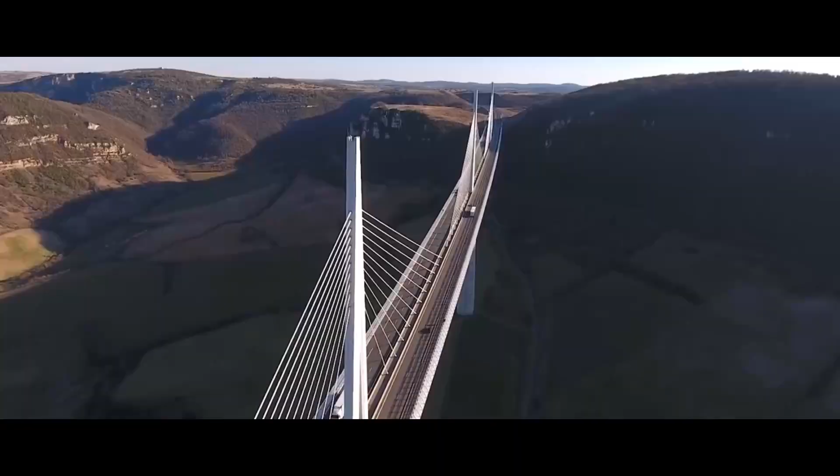When the word civil engineering is mentioned, visions of bridges, highways, and many structures come to mind. Occasionally, it is seen as a difficult program, or that students enrolling in this course must be academically knowledgeable. However, it is important for this generation to understand what civil engineering performs and how its specializations work. The biggest effect on our quality of life will come from civil innovations.

If you think civil engineers are insignificant, let me ask you these questions. Who built the malls where you go after class? The waters that flow into your home, and who finds out how to transport water from one place to another? To be sure, some of our existing infrastructures, such as bridges, roads, sewers, walkways, and airports, are decades old. It is the responsibility of civil engineers for designing, creating, and building new, better infrastructure.

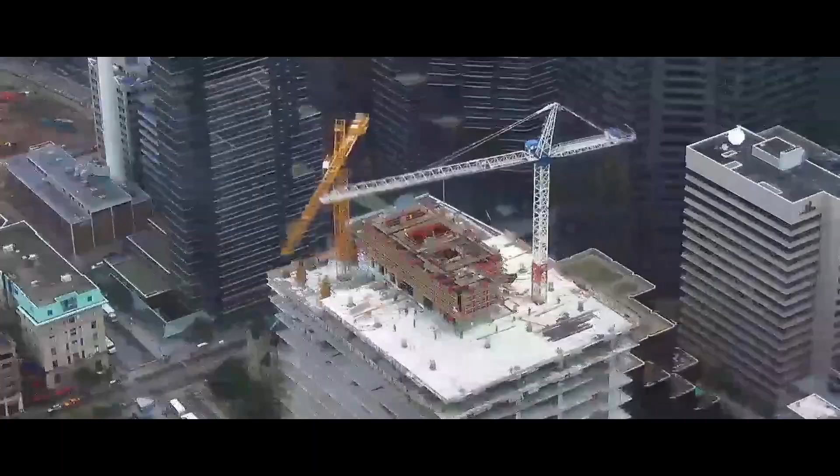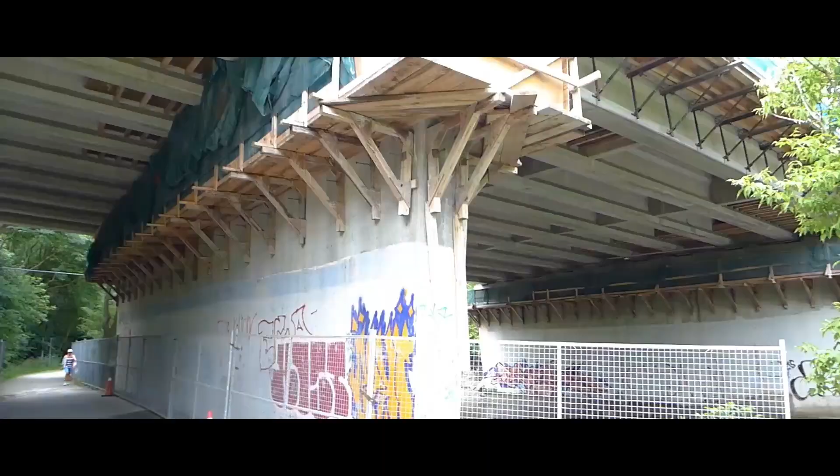Because urbanization reduces the amount of land available for construction, we must build higher. Clearly, it is one of the best professions in the world. They help to improve the people's quality of life. One of the specializations of civil engineering is construction engineering and management. It makes the paperwork concept a reality. Time, budget, and quality are real variables of construction engineering.

They are in charge of ensuring that the design and specifications are followed on the site. Construction engineering and management use their expertise in business, technical, and management. They made a significant contribution to each project. The structural engineers are known as the guardians of structures, while CEM engineers are known as builders of structures.

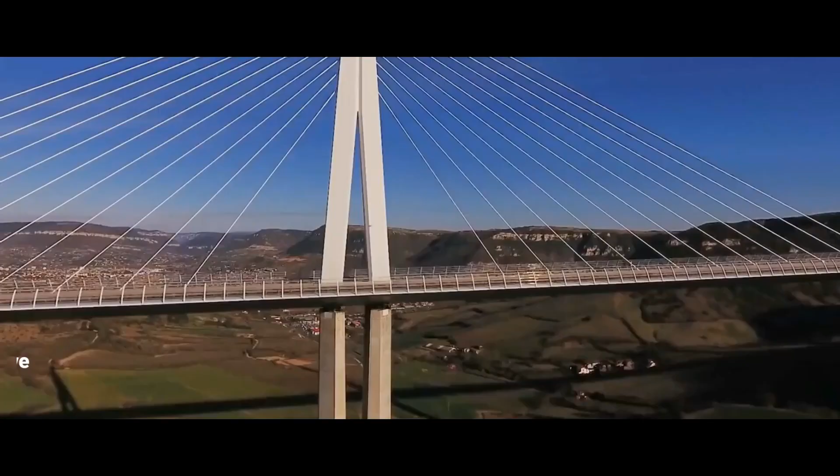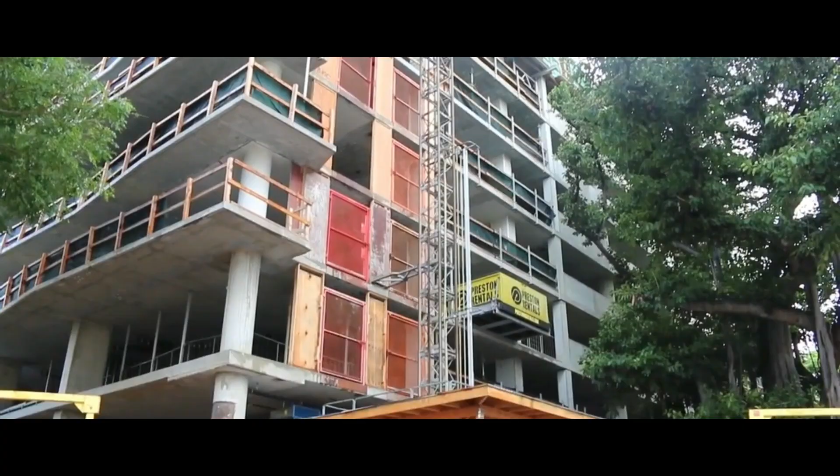Construction engineering and management is a profession for individuals who have great ideas and want to see their visions realized in the real world. If you have ever wondered how the country's tallest buildings, airports, stadiums, roads, bridges, and dams are built, the simple answer is that it's all due to people who work in the construction engineering and management industry. It is one of the civil engineering specializations. This field combines the study of construction engineering with the study of project management. This discipline is concerned with the whole course of a project's development.

Furthermore, it is a profession that is primarily concerned with the design, planning, building, and administration of a variety of infrastructures. Constructive application of critical thinking in scientific and technological areas increases the likelihood of a building project going well. This job may assist increase productivity and overcome barriers at the workplace by developing new solutions and quicker procedures. When it comes to enhancing safety, productivity, and catastrophic event resistance, construction engineering management may be helpful. The field of construction engineering management encompasses everything associated with the construction industry.

Planning and supervising the construction operations of a project, which entails conducting site layout, scheduling of the overall project duration so as to finish the job on time, and choosing the appropriate equipment for the job in order to do it as quickly and safely as possible, as well as organizing the work team by assigning individuals to particular areas of competence that may help with the job.

It is also essential to manage the materials in terms of quality and quantity, to keep track of the materials used in the project for simple compilation and reporting, protecting the environment by ensuring that everyone is on the same page, using safety equipment in construction, and ensuring that falling debris does not fall on persons passing by.

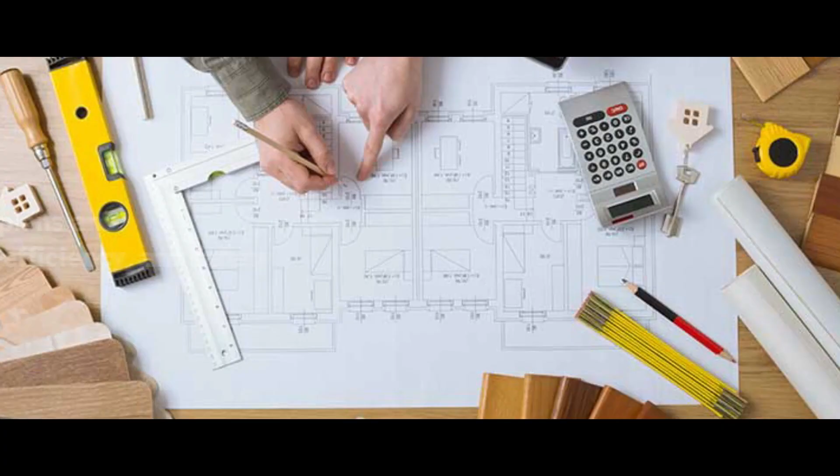CEM engineers should constantly review the plan to see if it is on track with what is actually happening in the project. Minor modifications may occur, so they must also adapt to ensure its safety and constructability. Maintain contact with the owner for whom you are constructing. They are your customer, and you should always explain the present state of the project with them in layman's terms. You should also constantly ask them what they want.

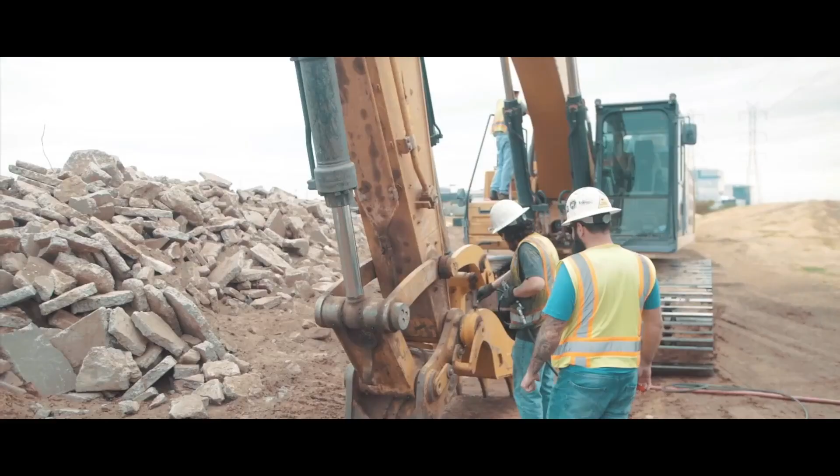Construction engineers might choose between working in an office environment and working in the field. It's not uncommon for it to be a combination of the two. Some construction engineers are more concerned with the design part of a project, whereas others are more concerned with the actual construction phase of a project.

With a degree in construction engineering, you can pursue various professional routes: general contractors, owners and developers, mechanical or electrical contractors, renewable energies, consulting and design firms, the oil and gas industry, the aviation industry, law firms, and historical restoration are some of the businesses that fall into this degree.

After a few years, you can sit for the professional engineer exam and become a licensed professional engineer. With a construction engineering degree and the professional engineering license, you can expect to rise through the ranks of your company's management. Many construction engineers rise through the ranks to hold managerial roles and even become business owners of their own construction companies.

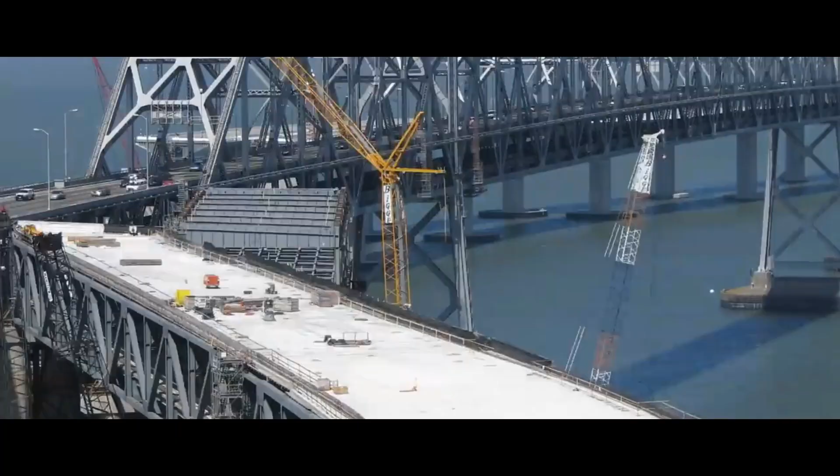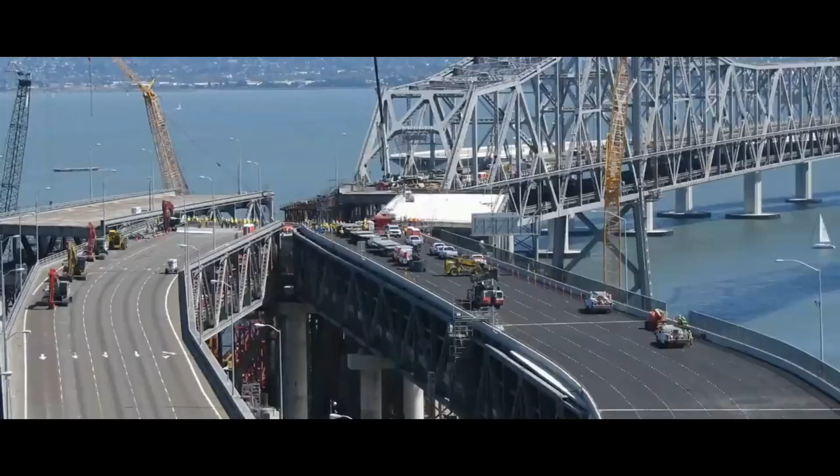Construction managers are accountable for monitoring and directing a variety of construction projects successfully from start to finish. Because construction managers are also project managers, construction engineers must be organized, strategic thinkers capable of collaborating with designers, architects, builders, and other engineers to translate theory into practice.

Construction managers are in charge of the planning, budgeting, monitoring, and implementing of construction projects from their inception to their completion. Estimators in the construction industry are responsible for creating and revising cost estimates by the Construction Specifications Institute MasterFormat framework from pre-project planning to the completion of a construction project.

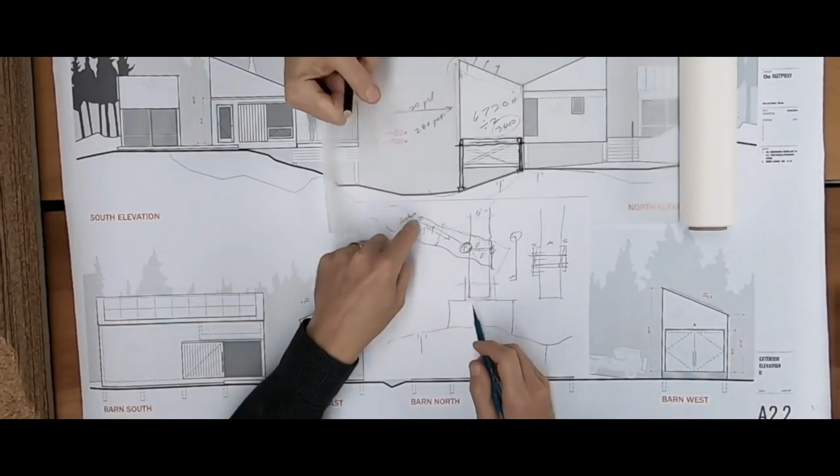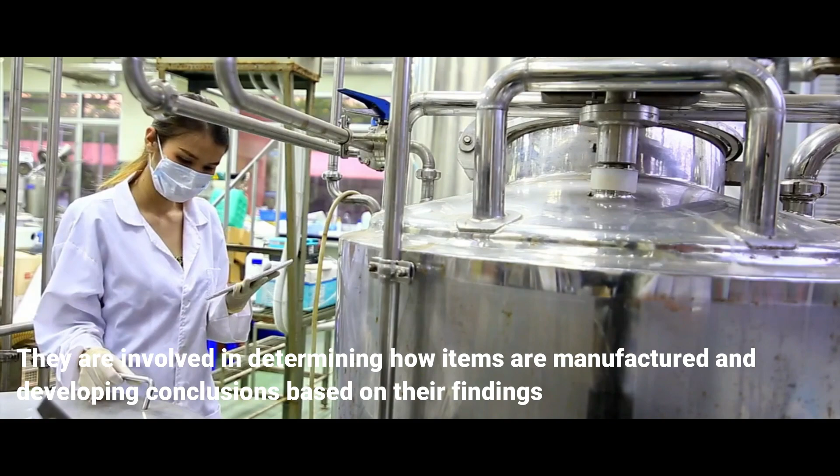When it comes to construction projects, a construction director is usually responsible for managing, supervising, and directing all aspects of the project. Construction project engineers collaborate with other engineers and contractors to guarantee that a construction project is completed on time and within budget. Engineering analysts can find employment in various industries ranging from information technology to healthcare administration. They are involved in determining how items are manufactured and developing conclusions based on their findings.

Engineers in charge of construction projects ensure that they are completed on time and within budget. Additionally, they may be held accountable for the safety of temporary structures utilized throughout the construction process. A construction manager is typically someone who has a college degree and has previous construction experience under their belt. Construction is becoming a more sophisticated and mechanized process, and the number of people who need formal education will probably expand in the future.

Educational level: in the Philippine setting, studying construction engineering and management is under the new curriculum of the 4-year civil engineering bachelor's degree. If a student wasn't able to enroll in the new curriculum, he or she will still be able to continue pursuing construction engineering and management by studying for a master's degree specializing in construction engineering and management, which is already under the Master of Science in Civil Engineering or MSCE, Master of Engineering Program or MEP, and Professional Science Master's Degree in Construction Management or PSM.

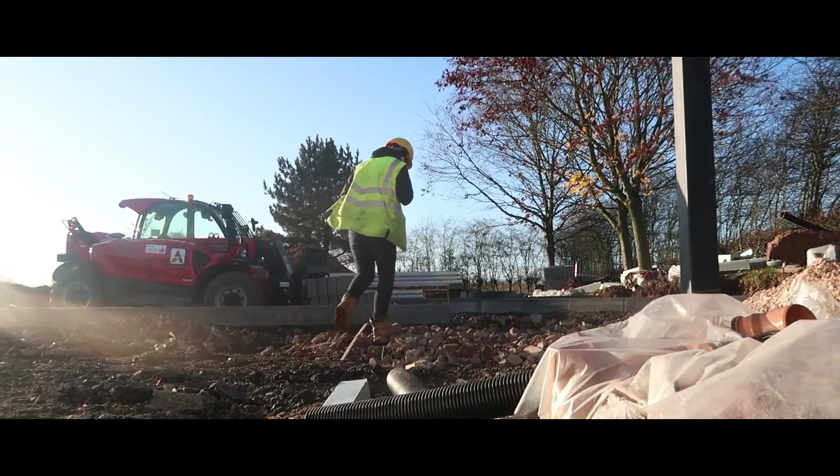The fields of interest that students must watch in the construction engineering and management track are advanced construction methods, construction cost engineering, database management, project management, quantity surveying, and safety management. Students in the construction engineering and management program have the opportunity to develop additional expertise in mechanical engineering, environmental engineering management, building information modeling, and many other options through minors in these fields.

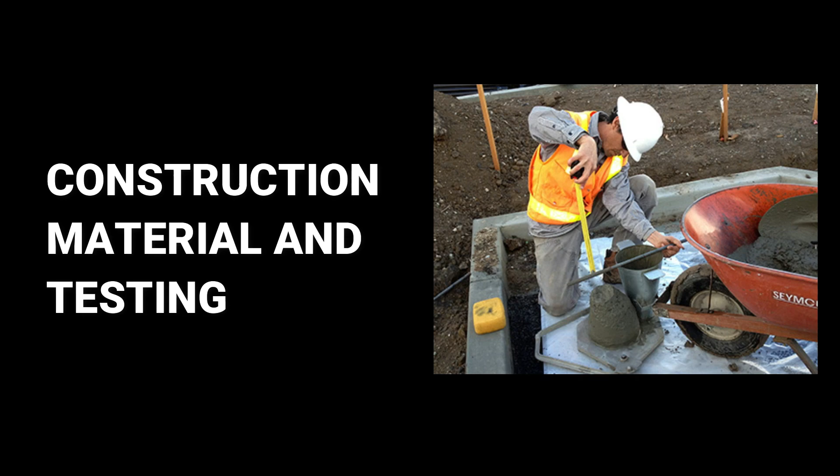The Construction Engineering and Management track specialization will equip students with a solid foundation in civil engineering, emphasizing current construction materials, techniques, and successful construction management practices. This specialization focuses on analyzing, designing, developing, implementing, and administering the complete infrastructure and large-scale construction process. The core subjects of construction engineering and management are as follows: General Science and Mathematics, Engineering Mechanics, Construction Management, construction materials and testing, building systems design, and lastly, quantity surveying.

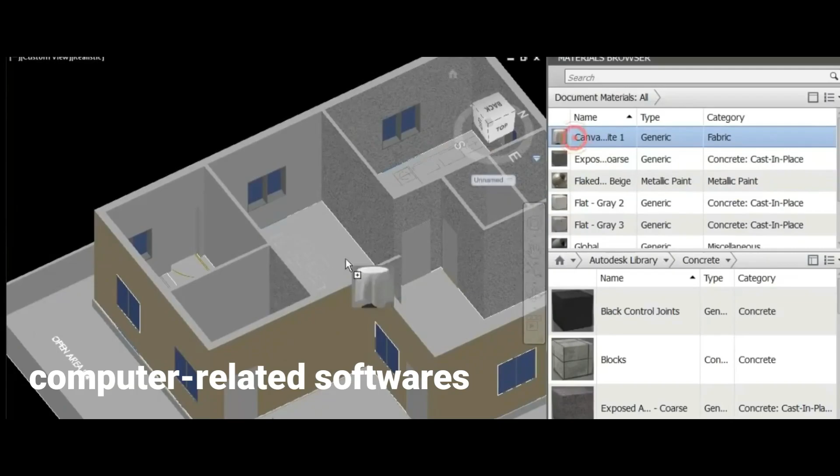Construction engineering and management requires the use of strong math, science, and computer skills, critical and analytical thinking, time and people management, and good communication skills. People who love building structures, have an aptitude for applying science and engineering methods to solve problems, and have the desire to learn in a constantly changing environment are also at an advantage in this field. CEM also requires the use of computer-related software such as computer-aided design and building information modeling.

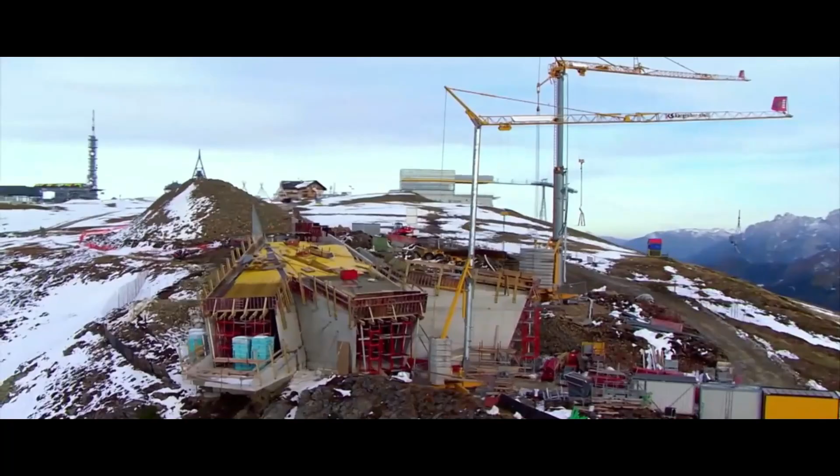The graduates of CEM are expected to practice any discipline that involves construction engineering and apply their knowledge of the fundamentals of structural and construction engineering like design and analysis, material testing and quality assurance, building systems, construction technologies, and lastly, surveying. Construction engineering and management is essential for the advancement of society. Construction engineers design and execute processes for buildings and maintain the infrastructure of our world.

It is at the forefront of establishing techniques and methodologies for creating 21st century building designs that integrate cost-effective innovations in energy efficiency and sustainability. This field can help improve safety, productivity, natural disaster resilience, and any aspect of the construction industry that could be addressed by construction engineering.

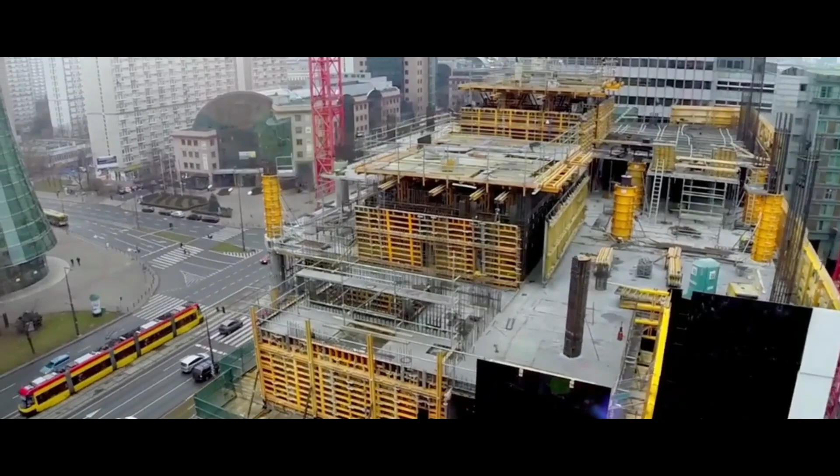In the Philippines, the average monthly salary of construction engineers is 35,000 pesos. Meanwhile, the average yearly salary is 420,000 pesos or 215 pesos per hour. For entry-level positions, the salary starts at an average of 270,000 pesos per year, while experienced workers make up to 720,000 per year. However, the salary still depends on the experience, the role in the company, and their knowledge. The average salary may also change as time goes by.

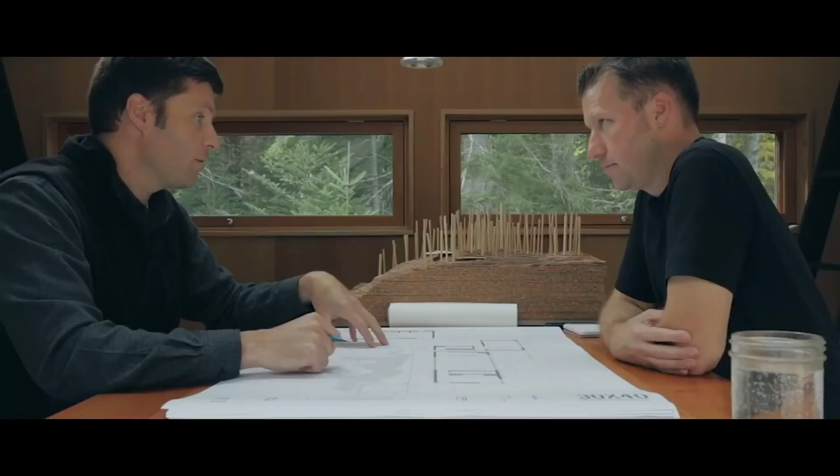First is to create a flow of communication. Establishing a flow of communication is most important of all elements of project management. May it be good or bad news, they are equally essential for the knowledge of everyone, including stakeholders and suppliers in the plant. A tool that provides ease in communication is Collaborative Work Management or CWM tool. In these, comments, attachments, scheduling changes, news, and budgets are synced real-time.

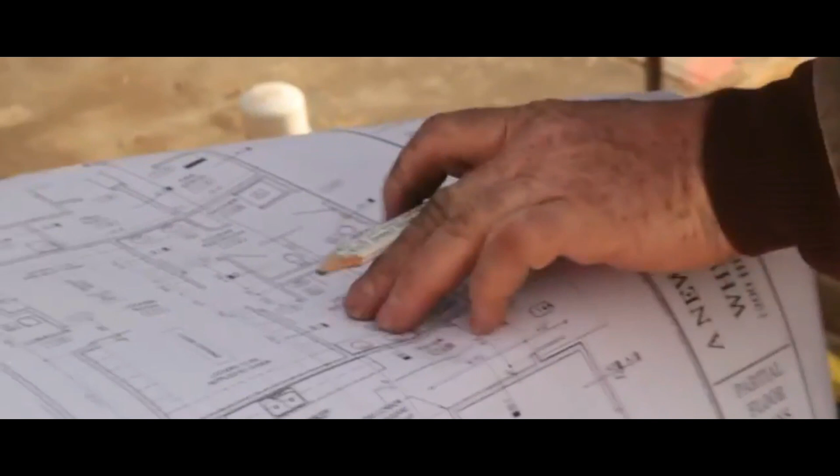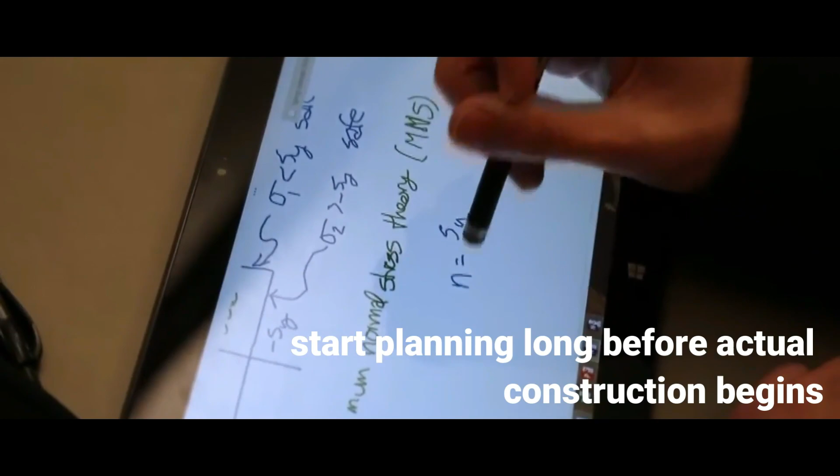Next is to make a habit of continuous planning. Planning may be the second of the Project Management Institute's 5 phases of project management, but construction project managers should start long before the actual construction begins and continue revising and developing plans until the project ends. This revision means being extensive to the extent that each stage of planning, from design to pre-construction and procurement stages, must undergo adjustments if need be.

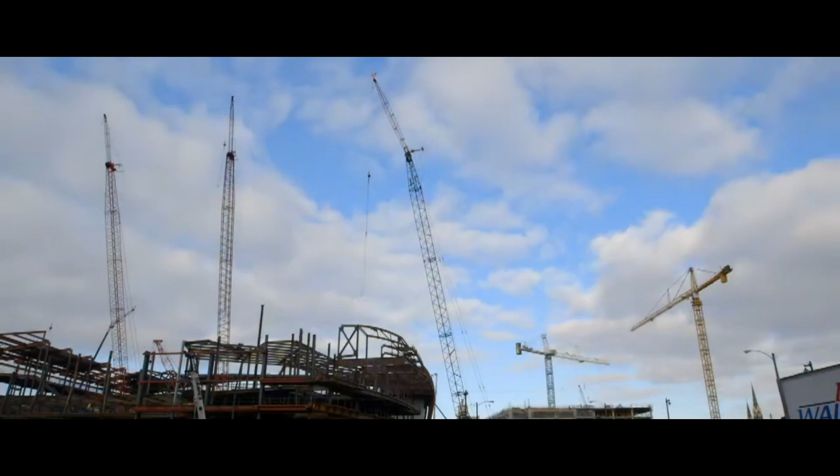Next is to observe and ask questions. Every good project manager becomes an integral part of the process, working figuratively and literally alongside others. Among other professions across industries, CEM engineers require attention and integrated effort just because of the nature of its work, which is so physical. At times, it is required to do field visits and inspections to actually see an issue in person before it can be resolved.

Fourth is to use tools to monitor costs and budgets. What needs to be monitored? Permits, wages, materials, and equipment of construction projects. What tools must be used? Software that tracks budgets. Since project managers have to think money constantly, from the initial bidding process to project closeout, all costs and finances must be tracked, monitored, and recorded using these tools.

Lastly is to implement automated reporting systems. Not everyone in a team that has concerns regarding the budgets or progress of a project has to be replied to by a project manager one by one. Automated delivery tools are oftentimes used by these kinds of work, where weekly distribution of various spreadsheets and status reports are needed. Some commonly used reporting systems are Safety and Health Management, Smartsheet, and DocuSign.

A construction project schedule is a written or a visual depiction of the steps necessary to finish or build the project. It is similar to a contractor's bid, that is an estimate of the amount of money it intends to spend on the project. The schedule is an estimate of the amount of time needed to complete the project. We need schedules to assist us to manage our construction projects as they grow more complicated and have tighter budgets.

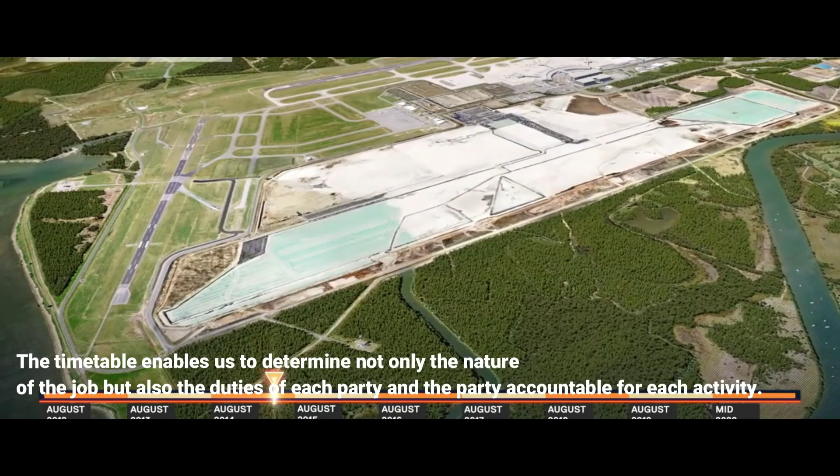Manpower should be scheduled in such a way that it avoids interruptions of productive time, repeated staffing up and down like hiring or firing of workers, creating a work logjam, or peak demand for equipment such as cranes and trucks. A scheduled equipment indicates the precise position of every piece of equipment, big or small, by using a numbered key or providing a description of the equipment in place.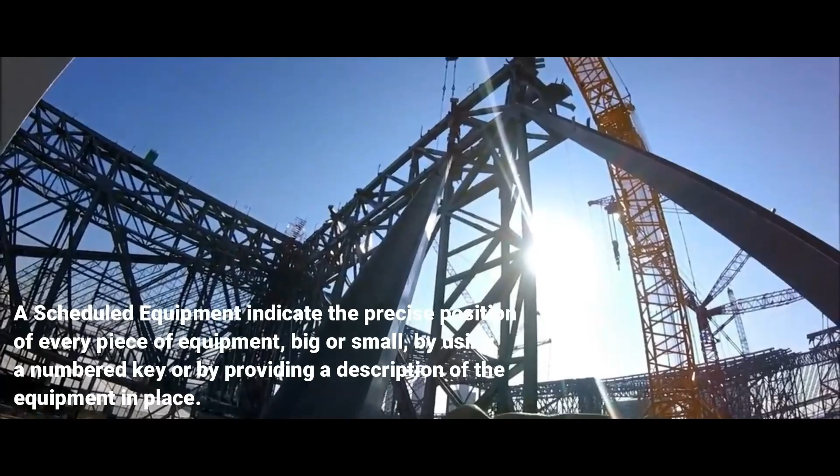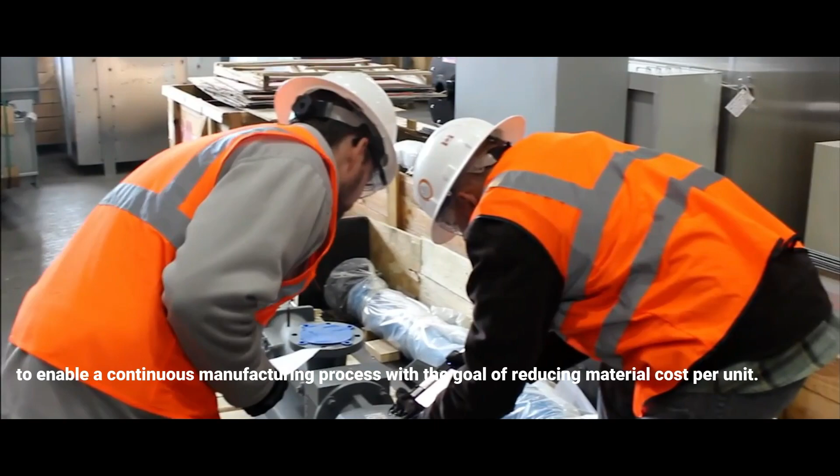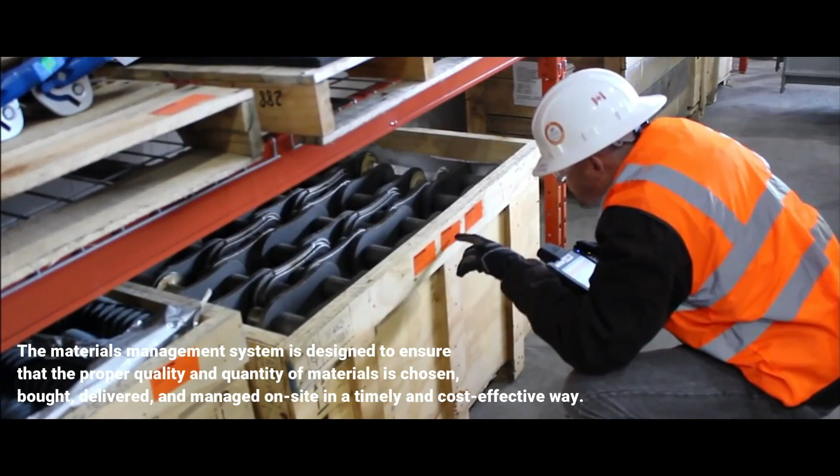Material control is a term that refers to management actions that include issuing instructions or directives to guarantee that sufficient quality and quantity of materials are maintained to enable a continuous manufacturing process with the goal of reducing material cost per unit. The goal is to ensure that the construction materials are readily accessible at the point of usage. The materials management system is designed to ensure that the proper quality and quantity of materials is chosen, bought, delivered, and managed on site in a timely and cost-effective way.

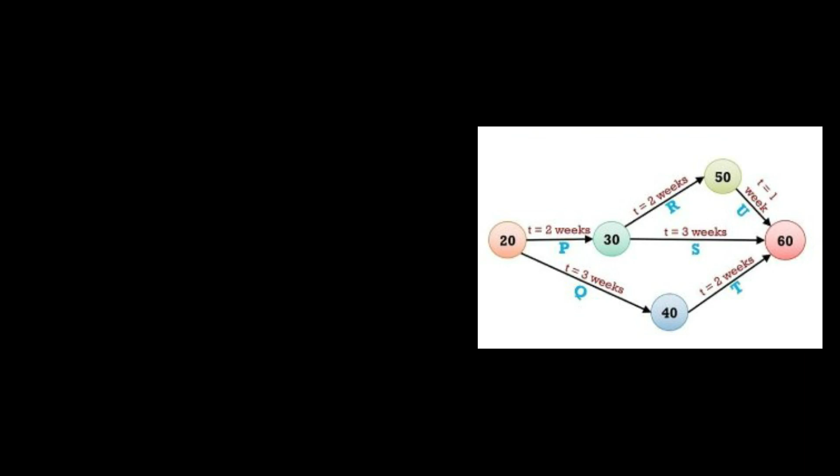CPM and PERT are tools used in building projects to manage operations efficiently. PERT stands for Program Evaluation and Review Technique, while CPM stands for Critical Path Method. PERT is a suitable approach for projects when the time required to accomplish several tasks is unknown. PERT is primarily used for work scheduling, organization, and integration within a project. It serves as the project blueprint and is an effective method for project assessment.

CPM is a method used for projects when the time required to complete the project is already known. It is mostly used to estimate how long it will take to finish a job. The critical route is the most important path in project management, since it always provides the shortest time for the project completion.

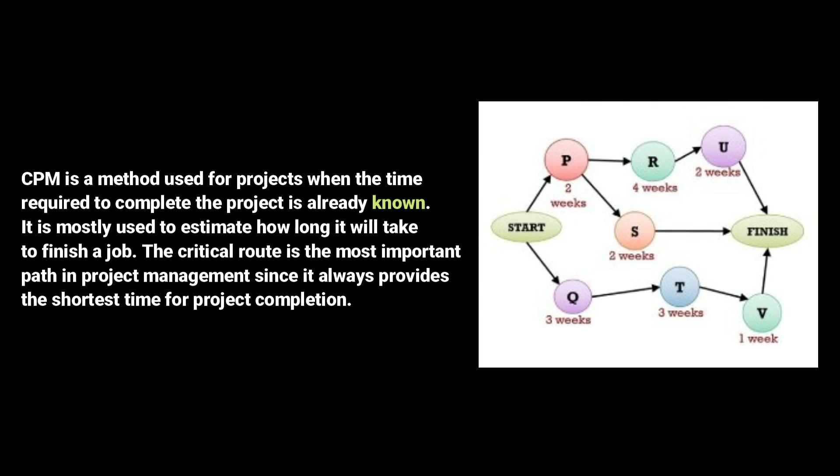Construction progress monitoring is an inspection that ensures that proposed construction is consistent with the funds that are being requested by the contractor. It also verifies that work completed is consistent with plans and specifications. Construction progress monitoring is done in conjunction with the general contractor's pay application request prior to any disbursement. A physical site observation is needed in order to independently verify the line item percentage completion of the construction performed during the draw request period.

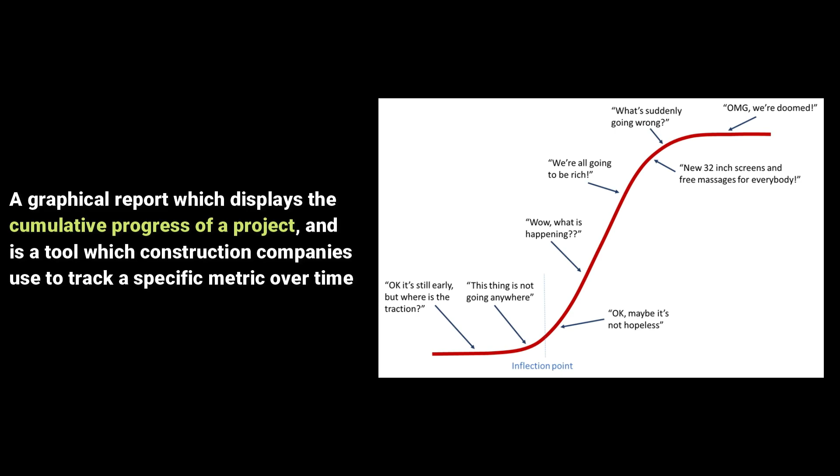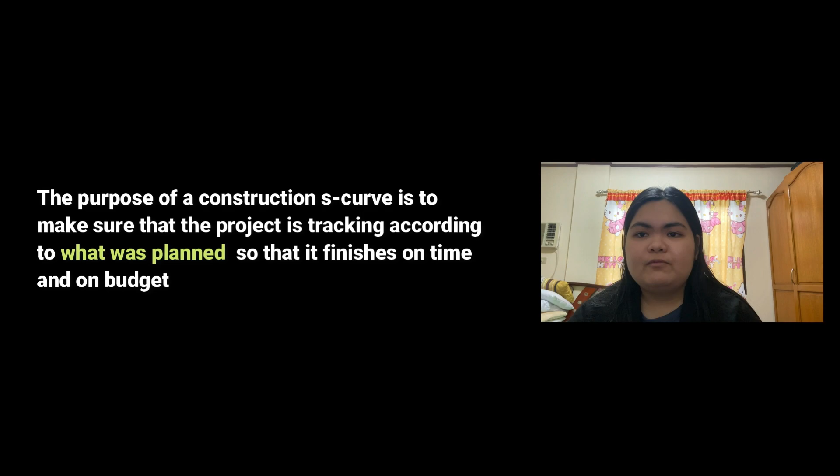The construction S-curve is a graphical report which displays the cumulative progress of a project and is a tool which construction companies use to track a specific metric over time. The purpose of a construction S-curve is to make sure that the project is tracking according to what was planned so that it finishes on time and on budget.

Network analysis is a technique for planning the outline of a project by examining the many activities linked with it. Complex projects are decomposed into smaller activities or tasks and then structured sequentially using network analysis. Then the order of tasks or activities is determined logically.

A construction schedule is a detailed plan. To accomplish a building project, it details tasks, schedules, and resources. A well-planned schedule includes tasks to be done and their due dates. Scheduling is the process of listing tasks, activities, and milestones with a start and end date.

Every task should be defined and comprehensive during the planning stage to maximize resource allocation and minimize unknowns so each activity's duration can be predicted. It is important for defining deadlines, assigning resources, pricing contracts, and determining cash flow. The importance of scheduling in construction projects cannot be neglected since it plays a crucial role in the project's success.

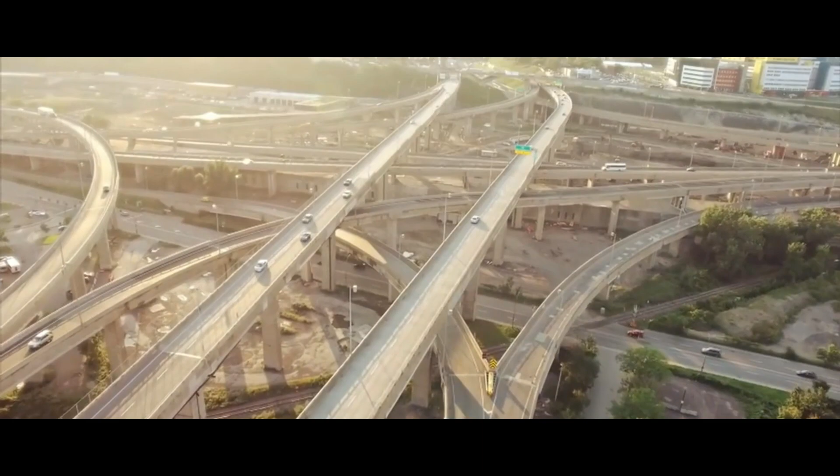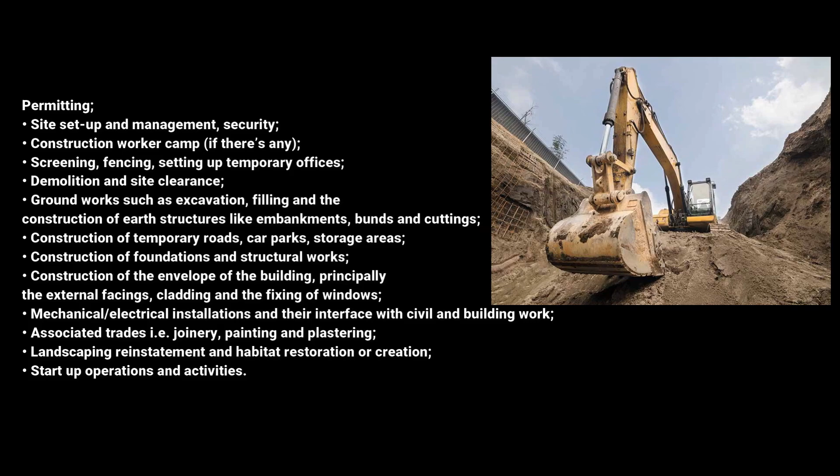Project activity is a milestone, component, or activity with several sub-activities. Project activities are defined as tasks that must be accomplished in order to finish a project activity. Under construction engineering and management, the project activities are permitting, site setup and management, security, construction worker camp if there's any, screening, fencing, setting up temporary offices, demolition and site clearance, groundwork such as excavation, filling and the construction of earth structures like embankments, bunds and cuttings, construction of temporary roads, car parks or storage areas, construction of foundations and

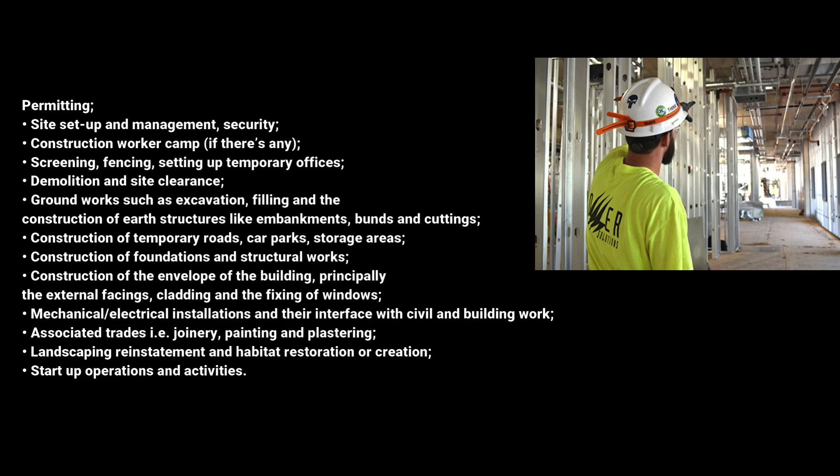structural works, construction of the envelope of the building, principally the external facings, cladding, and the fixing of the windows, mechanical or electrical installations and their interface with civil and building work, associated trades like joinery, painting and plastering, landscaping reinstatement and habitat restoration or creation, and lastly, startup operations and activities.

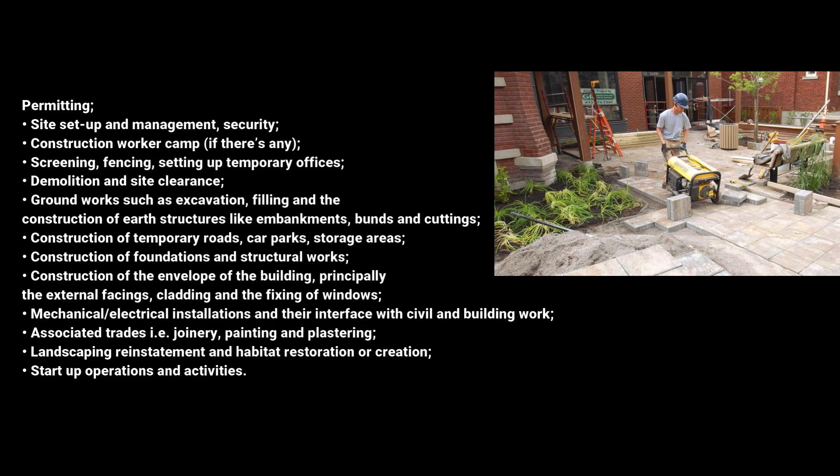The practice of a contractor submitting a tender to a customer as a proposal to undertake or manage a specific construction project is known as construction bidding. The bidding procedure is critical to the success of any construction project. This makes it possible for businesses to recruit contractors.

Tender documents for construction are among the most significant documents that construction firms, project, and asset owners deal with, since they determine who will deliver certain projects, which has a direct impact on all the companies involved in the project, as well as the project itself.

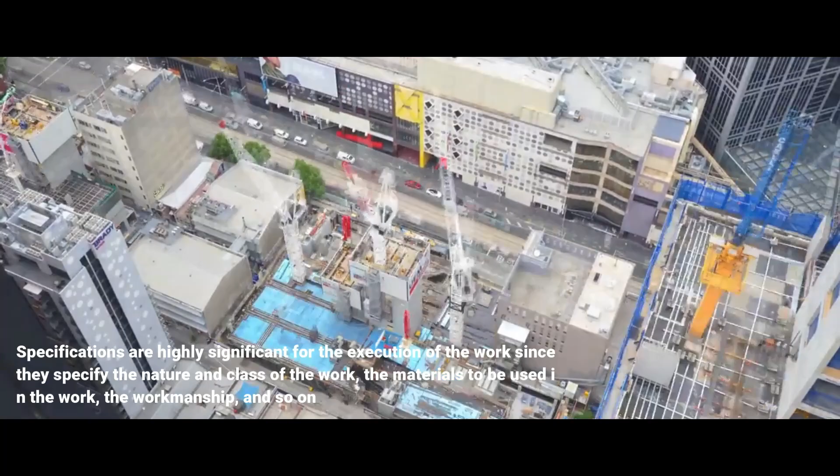The construction contract includes construction specifications. They describe the effort, materials, and installation needed to finish a project. The specifications serve as a field guide for subcontractors, outlining the materials to use, how to install them, and the expected level of quality. The specifications are highly significant for the execution of the work since they specify the nature and the class of the work, the materials to be used in the work, the workmanship, and so on.

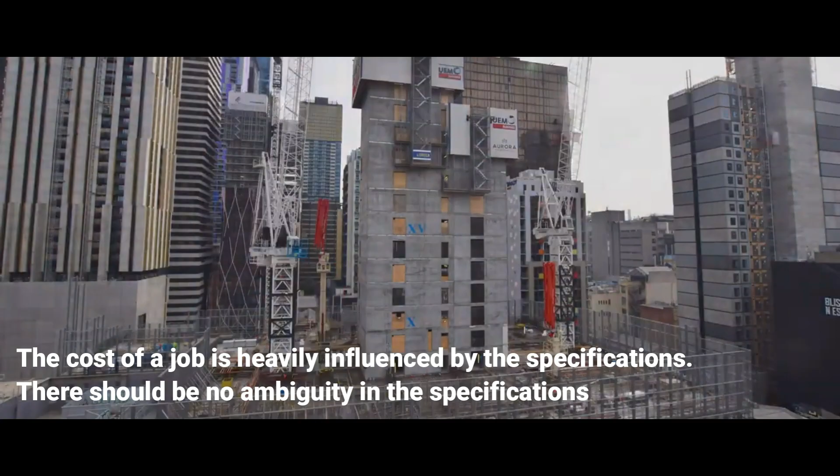The cost of a job is heavily influenced by the specifications. There should be no ambiguity in the specifications. One of the most important contract documents is the work specification, which describes the quality and amount of various materials necessary for a building project.

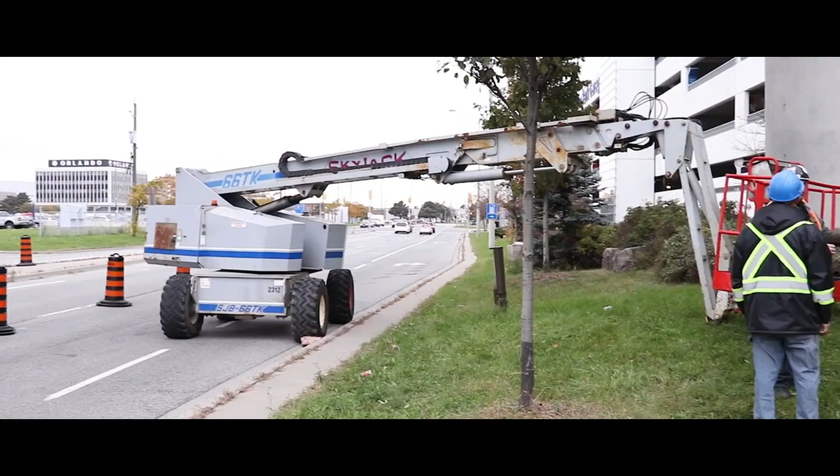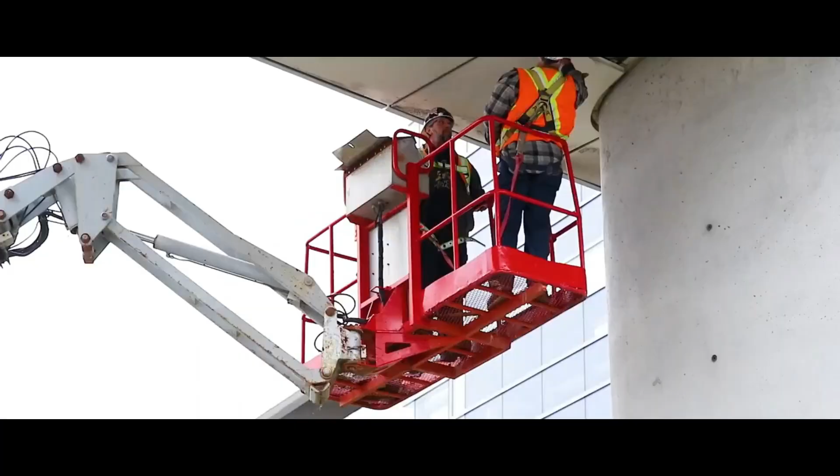Construction supervision entails the timely, professional, and competent oversight, inspection, and coordination of the work to ensure compliance with the authorized construction papers, contract documents, applicable rules, project timeline, and any other applicable requirements.

Applicants for the examination should satisfy the following qualifications. First, be at least 21 years old. Next, be a citizen of the Philippines. Be of good reputation and moral character. Be a holder of a bachelor's degree in civil engineering.

Coverage of exam: Mathematics, surveying, and transportation engineering, that is 35%. Hydraulics and geotechnical engineering, 30%. Structural engineering and construction, that is 35%.

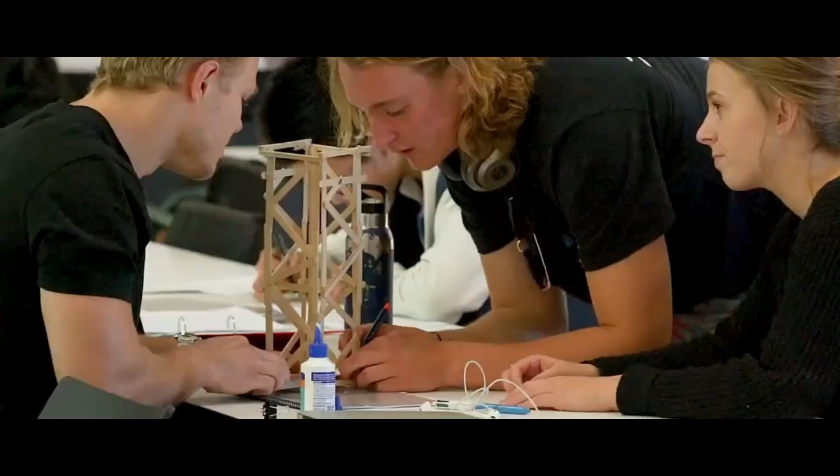Average rating not less than 70%, and no rating lower than 50% in any given subject. The Bachelor of Science in Civil Engineering or BSCE curriculum is a 5-year program that teaches students the fundamentals of science and engineering mathematics. It also seeks to give students technical knowledge and abilities in the planning, design, building, supervision, and maintenance of civil engineering works.

And defend the Constitution of the Philippines, that I will bear true faith and allegiance to the same, that I will obey the laws, legal orders, and executive orders promulgated by the duly constituted authorities of the Republic of the Philippines, and that I impose these obligations upon myself voluntarily, without mental reservation or purpose of evasion.

I further solemnly swear that at all times and places I will adhere closely to the ethical and professional rules generally accepted by the civil engineering profession in the Philippines, and that I will well and faithfully discharge to the best of my ability the duties and obligations incumbent upon a legally authorized civil engineer practitioner. So help me God. Congratulations.

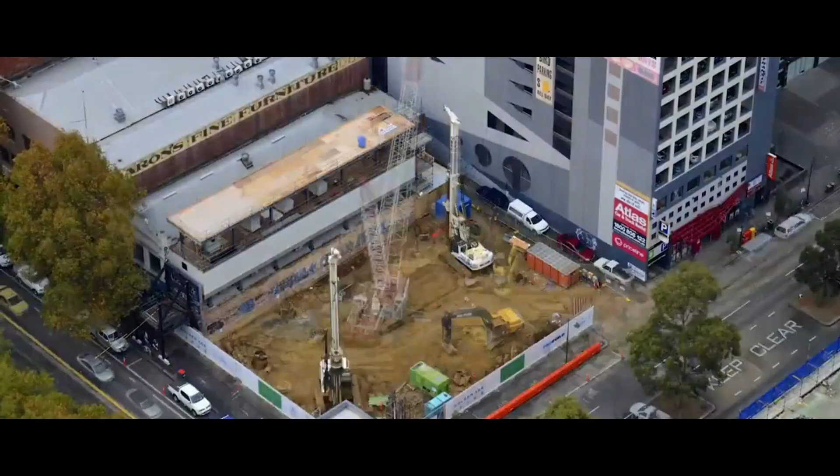For the Code of Ethics for Engineers, according to the National Society of Professional Engineers: for the rules of practice, first, engineers shall hold paramount the safety, health, and welfare of the public. Second, engineers shall perform services only in the areas of their competence. Third, engineers shall issue public statements only in an objective and truthful manner. Fourth, engineers shall act for each employer or client as faithful agents or trustees. Fifth, engineers shall avoid deceptive acts.

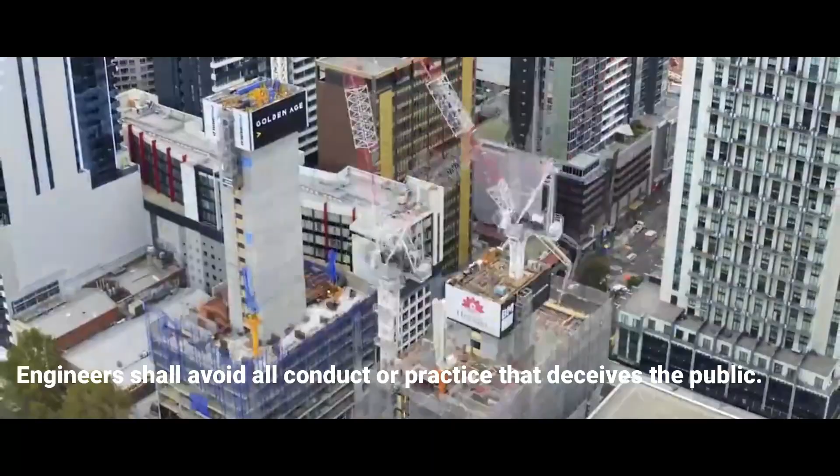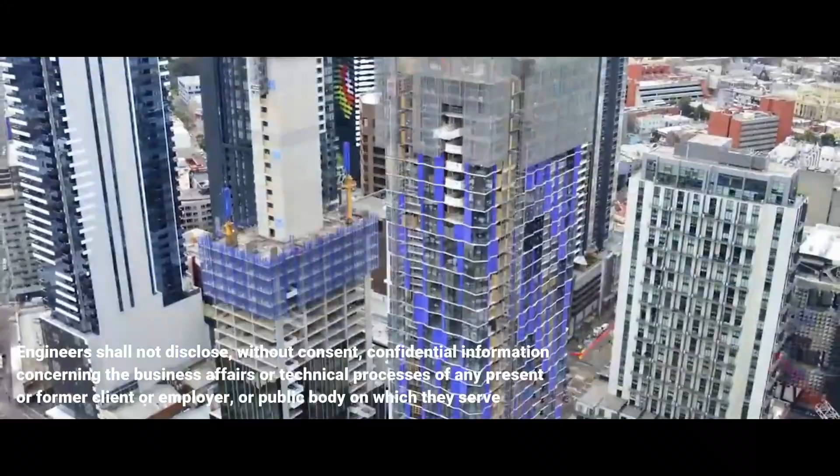For the professional obligations, first, engineers shall be guided in all their relations by the highest standards of honesty and integrity. Second, engineers shall at all times strive to serve the public interest. Third, engineers shall avoid all conduct or practice that deceives the public. Fourth, engineers shall not disclose without consent confidential information concerning the business affairs or technical processes of any present or former client or employer or public body on which they serve. Fifth, engineers shall not be influenced in their professional duties by conflicting interest.

Sixth, engineers shall not attempt to obtain employment or advancement or professional engagements by untruthfully criticizing other engineers or by other improper or questionable methods. Seventh, engineers shall not attempt to injure, maliciously or falsely, directly or indirectly, the professional reputation, prospects, practice, or employment of other engineers. Engineers who believe others are guilty of unethical or illegal practice shall present such information to the proper authority for action.

Eighth, engineers shall accept personal responsibility for their professional activities, provided, however, that engineers may seek indemnification for services arising out of their practice for other than gross negligence where the engineer's interest cannot otherwise be protected. Ninth, engineers shall give credit for engineering work to those to whom credit is due and will recognize the proprietary interest of others.

For the seal and use of the seal, the board authorized the design of the seal. The certificate serial number shall be incorporated into the design of the seal. The engineer shall seal and sign all official papers like estimates, designs, specifications, and plans. Civil engineers are required to indicate the following on the plans and documents he or she signs within his practice. First is the certificate of registration and the PRC ID. Next is the professional tax receipt number.

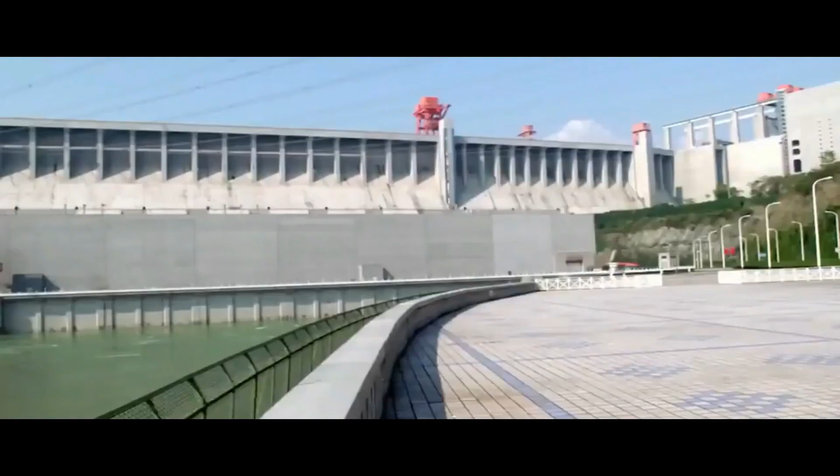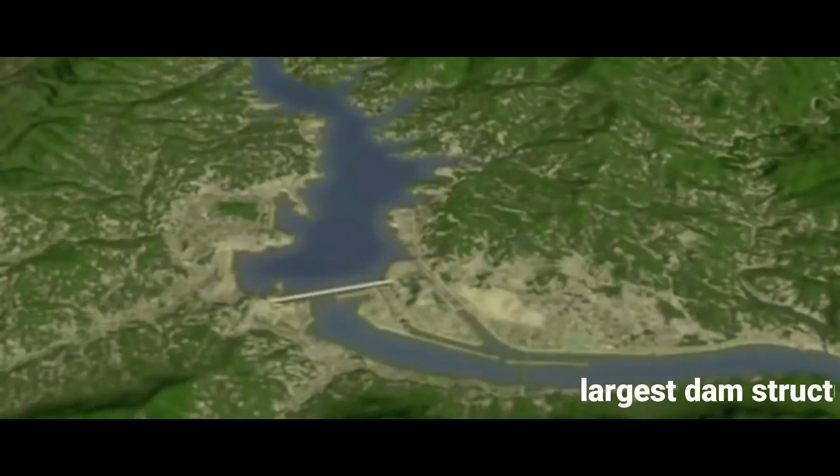Second is the Three Gorges Dam. This is a dam located on the longest river in Asia, which is the Yangtze River. The construction began officially in 1994, which at that time was considered the largest engineering project in China. On its completion in 2006, it was recognized as the largest dam structure in the world. It incorporates 28 million cubic meters of concrete and 463,000 metric tons of steel into its design.

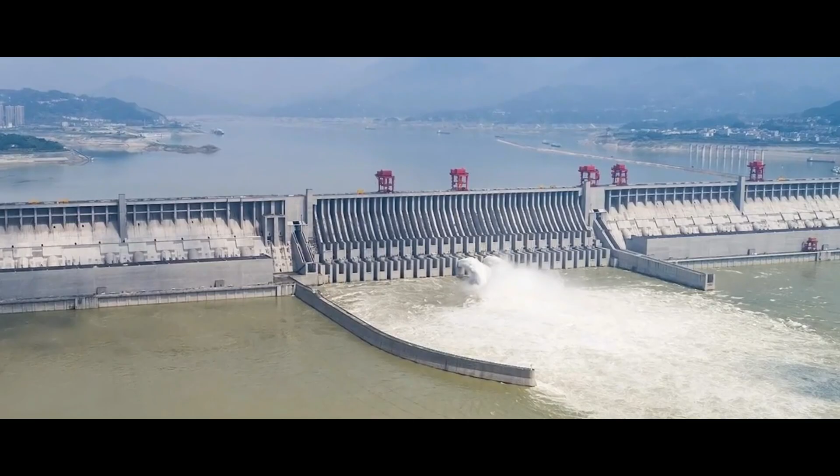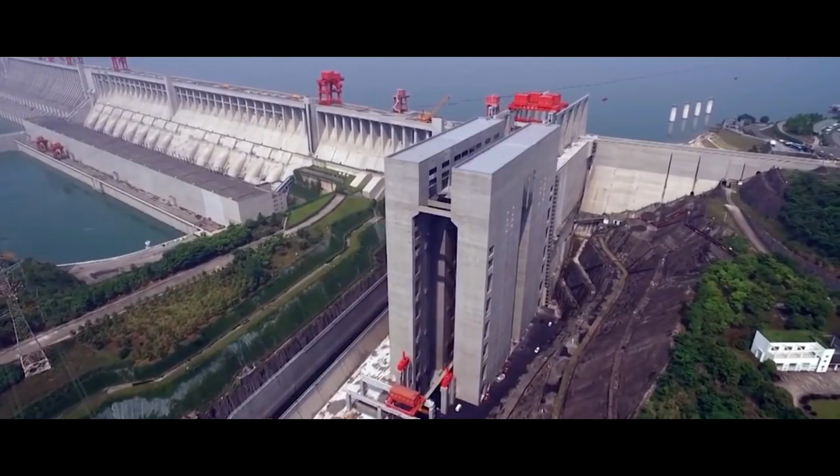As more turbines have been added from 2003 to 2012, the expected yield of hydroelectric power has been achieved from all of the dam's 32 turbines. It can generate 22,500 megawatts of electricity, making it the most productive dam in the world. Although there are controversies surrounding how this dam supposedly prevented flooding, it was built on the intention of protecting millions of people in the Yangtze Basin.

Lastly is the Chichen Itza. Chichen Itza is a Mayan city that was built in the northern tip of the Yucatan Peninsula of modern Mexico. It is generally considered that this megastructure was built around 400 CE, with its civilization of 50,000 inhabitants flourishing between 750 and 1200 CE. Its architecture is inspired by militarism, in which it promotes images of jaguars, eagles, and feathered serpents.

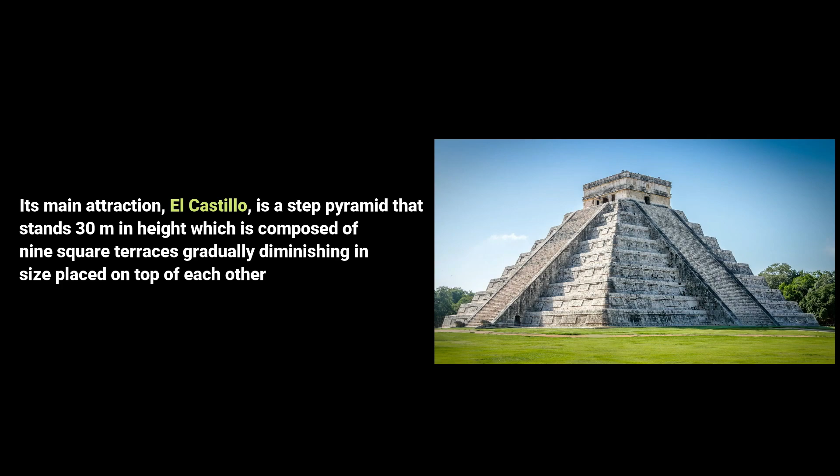Its main attraction, El Castillo, is a step pyramid that stands 30 meters in height, which is composed of 9 square terraces, gradually diminishing in size, placed on top of each other. Today, it is listed by UNESCO as a World Heritage Site.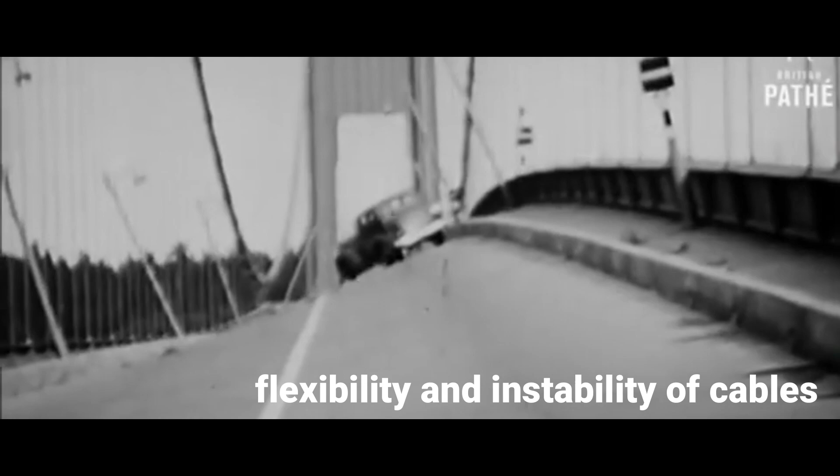The issue was in the flexibility and the instability caused by the cables. The original design intended the use of a material of greater stability and more standard design. But because of its cost, they opted for cheaper options, which is using plate girders. This resulted in a disproportionate depth-to-width ratio.

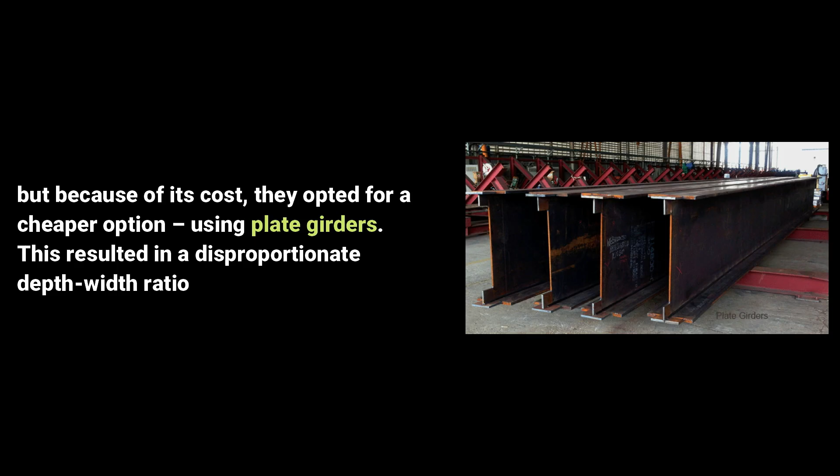Next is the Walkie-Talkie building in London. It was known for its death ray effect as well as the wind tunnel effect. The concave shape of the building meant that when sunlight shone directly on it, it acted as a mirror and focused the light onto the street below, which caused temperatures to rise to 160 degrees Fahrenheit.

Additionally, the building caused increased wind activity at the street level. The winds were so strong that they were blamed for blowing over street signs, trolleys, and pedestrians.

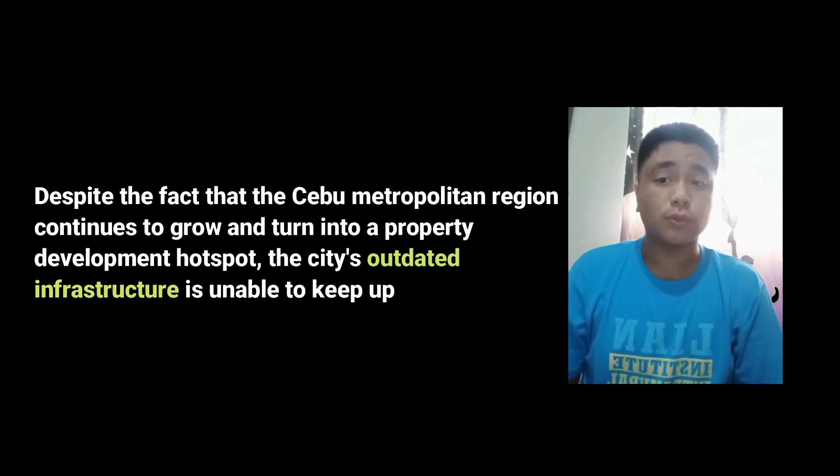For construction projects in the Philippines, we have here the Cebu-Cordova Link Expressway. Cebu has developed into one of the Philippines' most prosperous economies, despite the fact that the Cebu metropolitan region continues to grow and turn into a property development hotspot. The city's outdated infrastructure is unable to grow or to keep up.

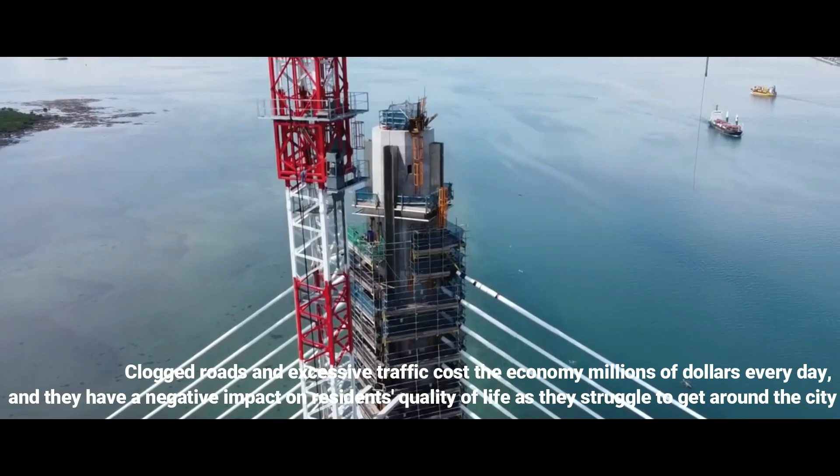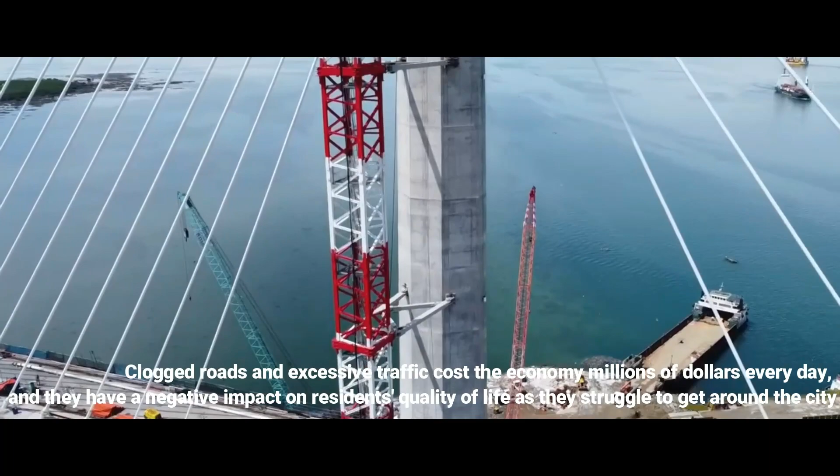Residents and workers in the neighborhood are enduring lengthier travel times due to traffic congestion due to stressed urban transportation infrastructure. Clogged roads and excessive traffic cost the economy millions of dollars every day, and they have a negative impact on residents' quality of life as they struggle to get around the city. Cebu-Cordova Link Expressway Corporation proposed building a third bridge to alleviate the city's growing traffic congestion.

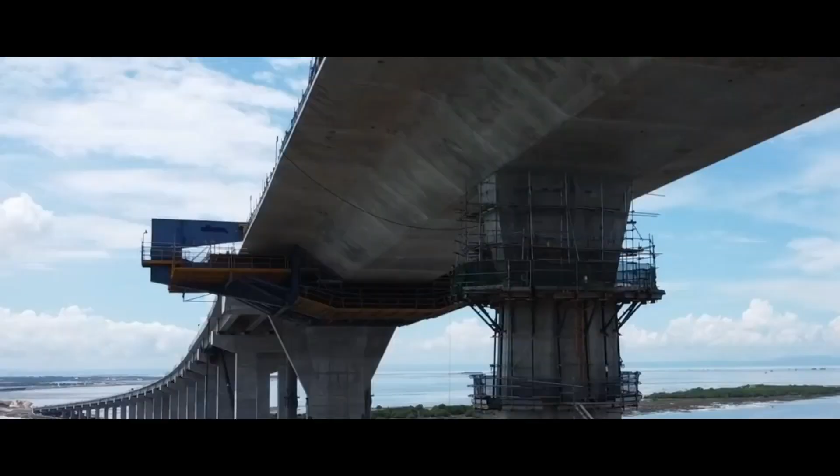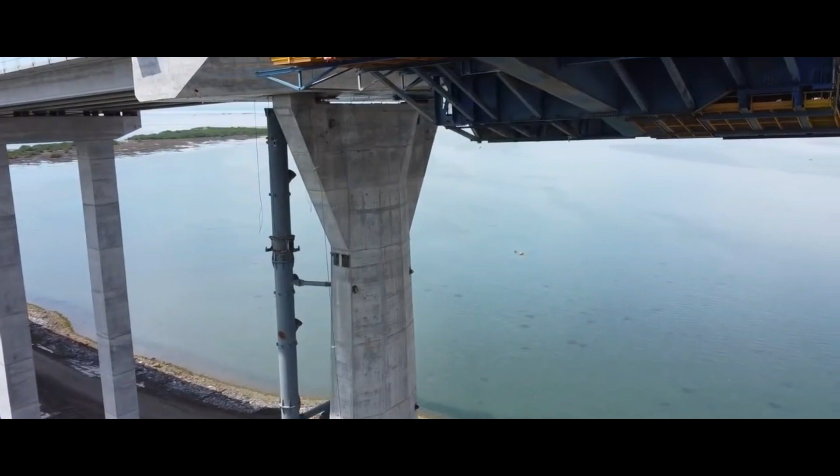The Cebu-Cordova Link Expressway, or CCLEX, is an 8.9-kilometer bridge that would link the island of Mactan in the Cordova municipality to mainland Cebu. It will serve as a secondary route to and from Mactan Cebu International Airport with a daily capacity of 50,000 cars and will cut travel time by about 40 minutes. Building CCLEX, like any other famous infrastructure project, comes with substantial risks and challenges. As a result, the customer enlists the help of a group of experts to assure project success.

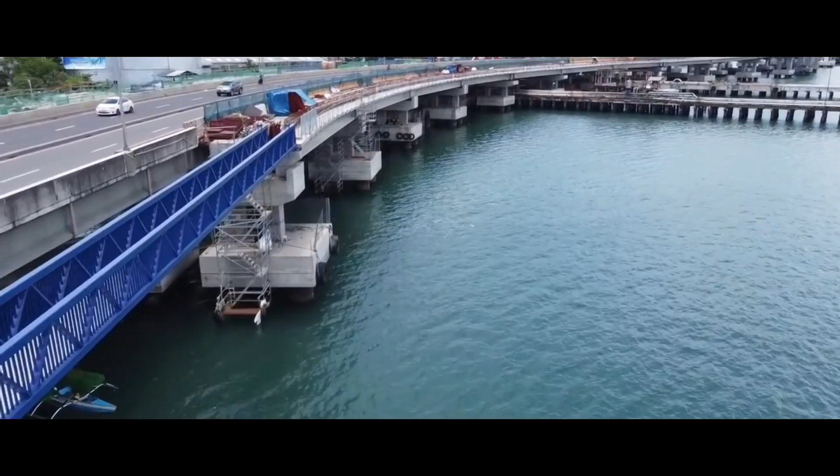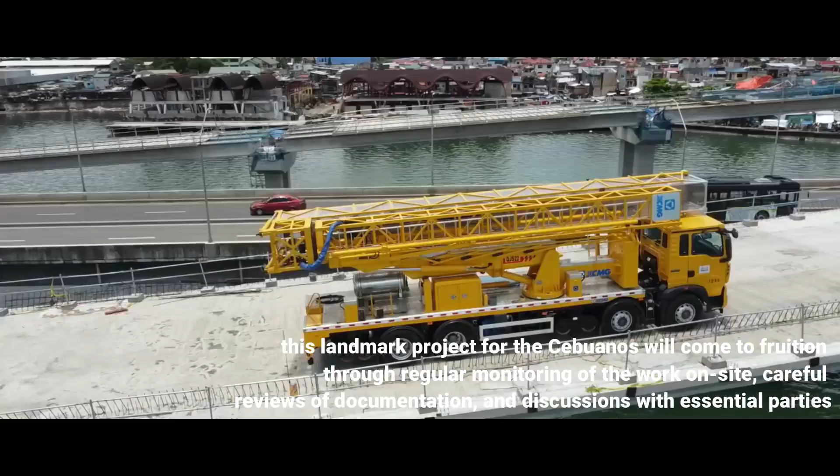Arcadis performs due diligence reporting and certification of accomplishment and expenses as the project's technical advisor for the lenders. These procedures assist in ensuring that all important tasks for successful delivery are on track. We help guarantee the customer that this landmark project for the Cebuanos will come to fruition through regular monitoring of the work on site, careful reviews of documentation and discussion with essential parties.

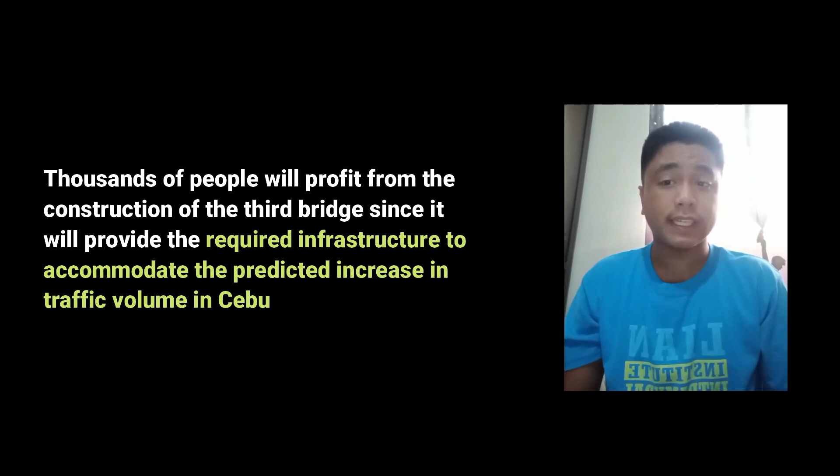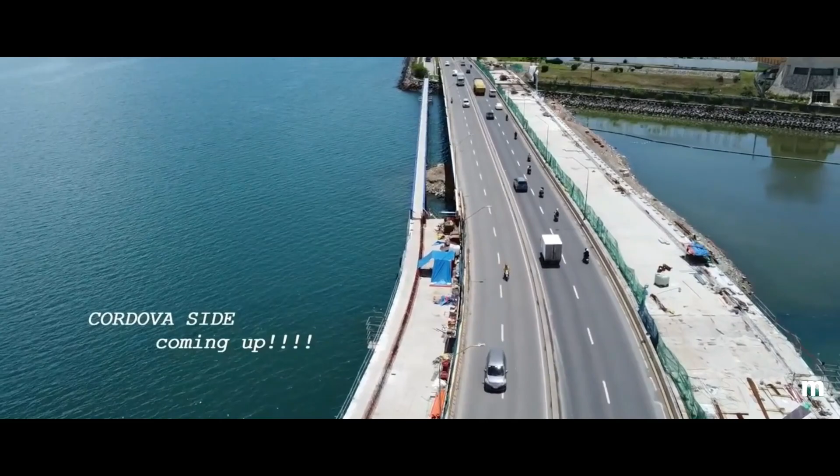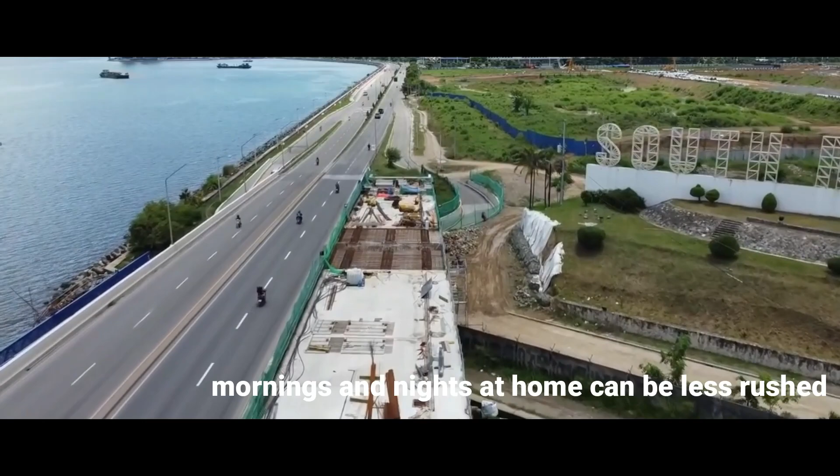Thousands of people will profit from the construction of the third bridge since it will provide the required infrastructure to accommodate the predicted increase in traffic volume in Cebu. It will also connect neighborhoods, people, and business to greater opportunities once it is operational. By creating jobs in Cordova, it means that mornings and nights at home can be less rushed, leaving more time for what matters most: families, friends, loved ones, and significant projects and causes that each person values.